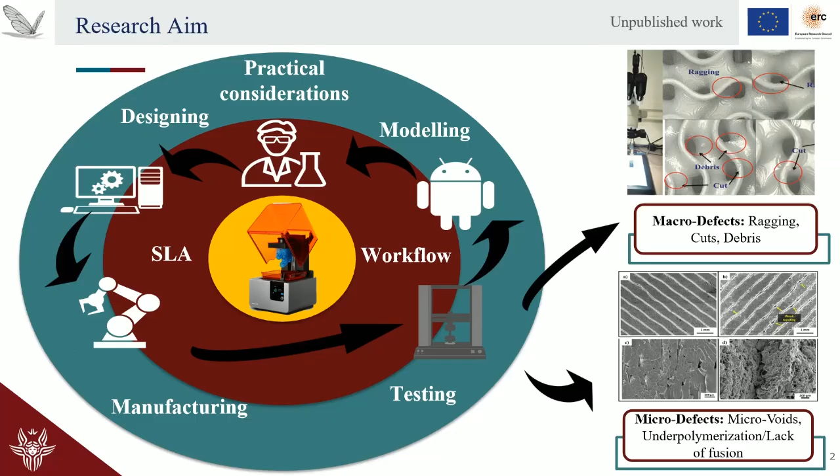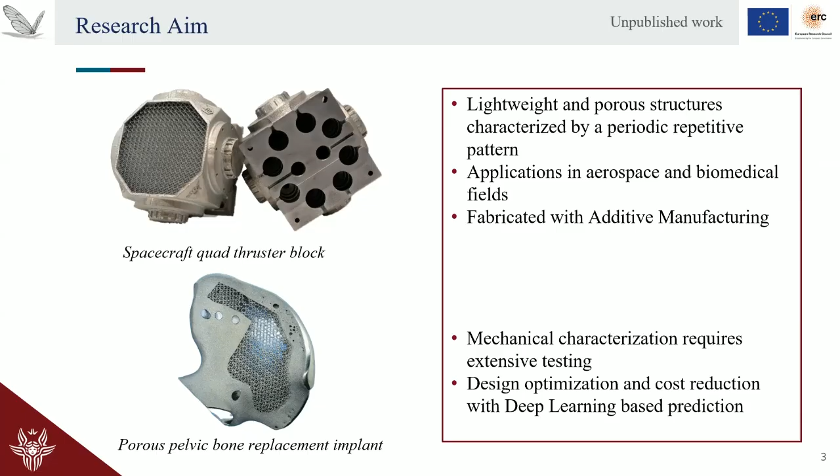So I'm going to investigate lattice structures because they're a very hot topic in recent years. They find a lot of applications in aerospace since they are very lightweight and retain good mechanical properties. And they're also used in biomedical applications to fine-tune the mechanical properties of prosthetic objects. So, sorry.

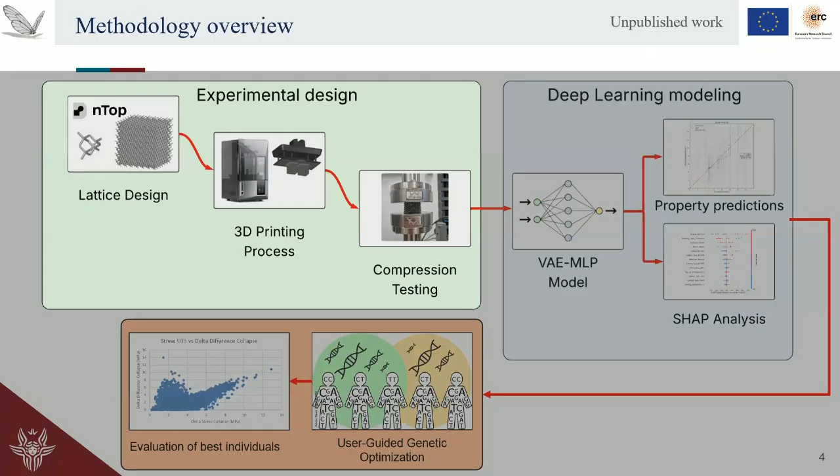Okay, so this is the overview of my work. We start with the experimental design. We dive into the deep learning modeling used in this work, and we finish with the genetic optimization of the mechanical properties of those lattices. So let's dive in with the first part.

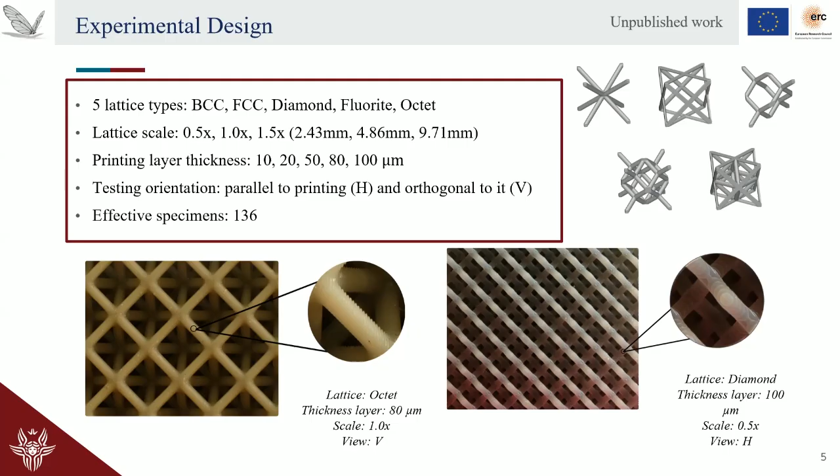Here is the design of experiment used in this work. It's very simple, based on a Latin hypercube. I have considered 5 different types of lattice cells. This is a preliminary study, so this will be expanded in the future. We have the most common ones: BCC, FCC, diamond, fluorite, and octet. And 5 different printing layer thicknesses, because we are dealing with SLA printing, ranging from 10 microns to 100 microns, and 2 different printing orientations, both in axis with the printing direction and orthogonal to it, for a grand total of 136 specimens.

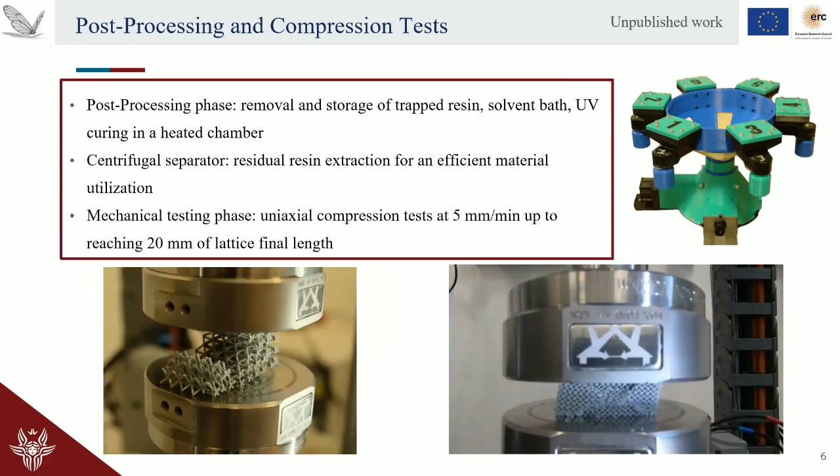After printing, just for completeness, since these specimens are very porous and we are dealing with vat polymerization, we have to properly separate the unpolymerized resin and solvent with a centrifugal separator. After separation, we post-cure them with a UV bath, and after that, we tested the specimens under a static test using a 10 kilonewton testing machine.

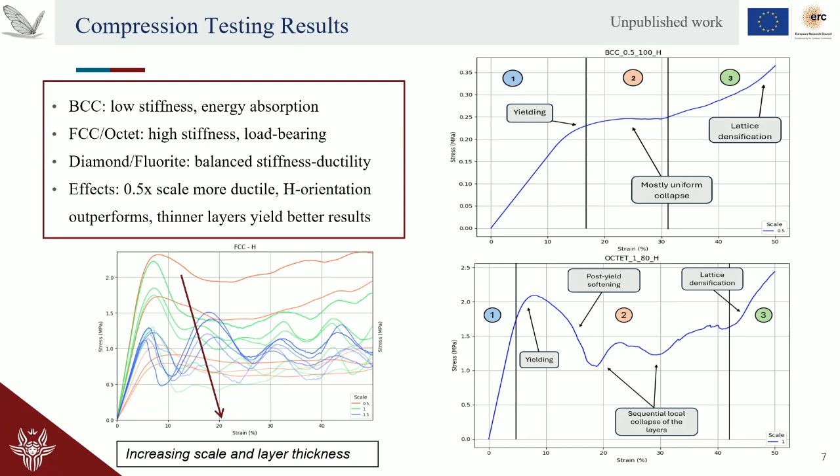And here are the results of the tests performed, and they are very in line with the literature. We see common behavior. For example, the BCC cell shows low stiffness and high energy absorption, but that's no wonder because it has very bending-dominated mechanics. And octet cells have a mixed behavior because they also have a lot of straight pillars that act as stretching-dominated regions. So those cells are high in stiffness and high in load bearing. And that's just to show you that the manufacturing was done correctly. So we can move to the next section.

So here we decided to treat the mechanical response not by modeling the whole stress-strain curve, but just modeling some pivotal points, such as stiffness, yield, energy absorption, and the UTS of the materials. In order to do so, we had to greatly increase the complexity of our AI model, since the task itself is very complex. We are dealing with both topology and print parameters. So we have to improve the model.

In this case, we had to use a multi-head statistical boosting neural network. So it's a neural network, by definition. It's multi-head, so it has one specialized head for each mechanical property that it's trying to predict.

It's statistical, since here we are trying to model a process that is inherently stochastic, since it's a partially observed Markov process. We are not knowing everything about the process, so we cannot use a prediction that is deterministic. We have to use something that is statistical to truly capture the dynamics of the process.

And the neural network itself is boosting, so we have several models, and each one of them is modeling the error of the previous model. So this boosts a lot the accuracy of the overall model. On top of that, we use a common backbone for the head to fully stabilize the prediction. Okay, so it's just a numerical stabilizer, but it also boosts the accuracy.

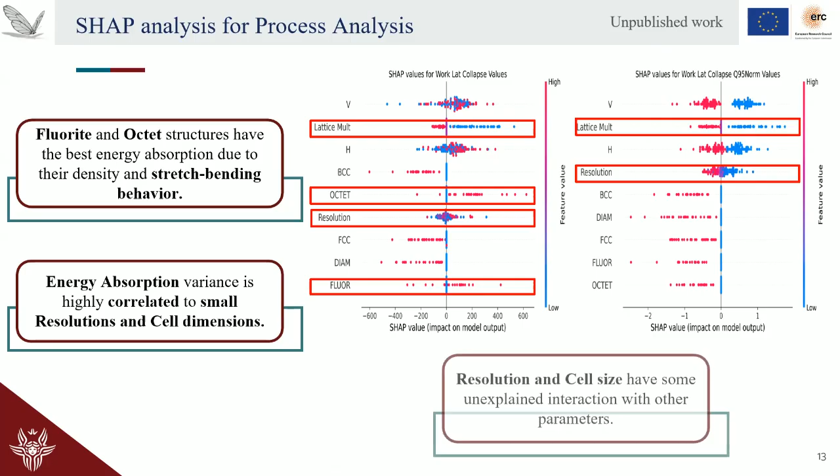But what is interesting is that also the scatter increases both by decreasing the cell size and by decreasing the resolution. And that's very counterintuitive because we are increasing the overall toughness, but we are increasing also the scatter. So our specimen is much more prone to defects. So why that? There is an interaction, an obvious interaction inside our problem.

And by studying the interaction by using SHAP values, this is just a double interaction. But we can see here, it has almost fully decoupled the contribution, and it isn't fully decoupled because probably it's a triple or quadruple interaction, and it's very hard to plot it in 2D space.

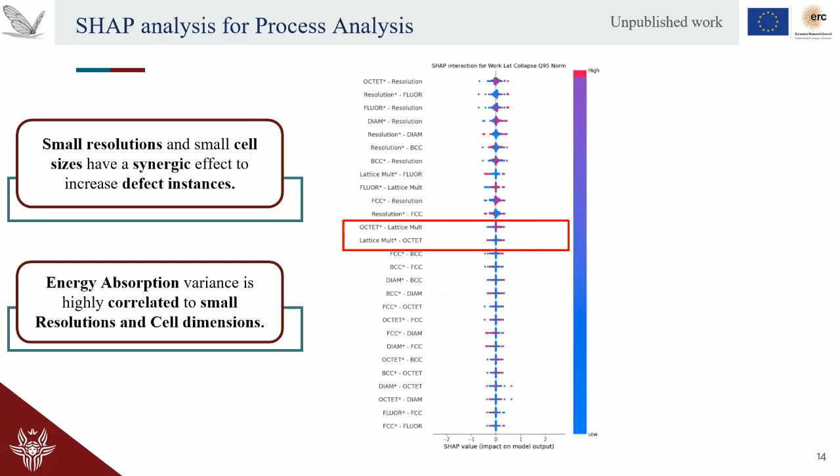So there is some synergistic effect between the topology, the cell size, and the resolution. But why that? The motivation is very simple, because the octet cell is very dense. And when I decrease further the cell size, I increase a lot the density of the cell. And since after washing I had to post-cure the specimen, the light wasn't fully reaching the inside of the component. So inside there are a lot of regions under-polymerized. And this was fully confirmed by observing the fracture surfaces of the specimen, because inside it wasn't fully polymerized.

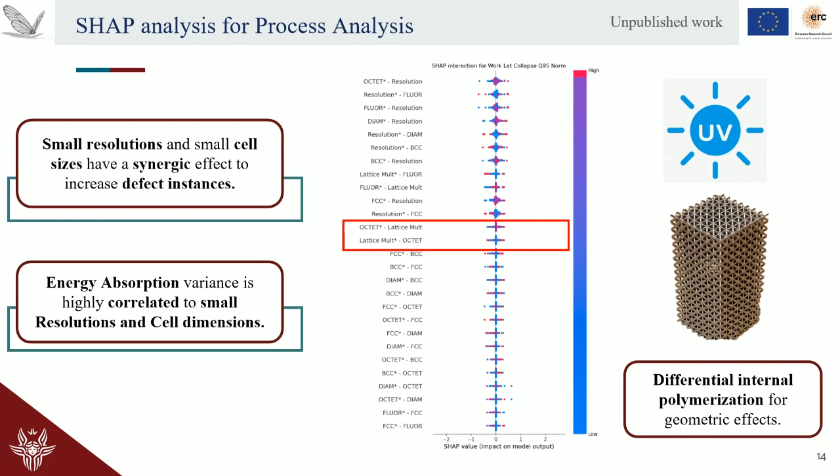But what's interesting is that the model was able to do this analysis by only observing data. So that's really interesting because it fully captured the inner mechanics of the process. But that's just for modeling. Now let's dive in for optimization, because now we have confirmed that our model works. So we can use it as a virtual environment to do some optimization of mechanical properties.

So in this case, I use a genetic algorithm. So you have your input parameters, in this case topological and process parameters. You encode them into blocks. Each block is a gene. Enough genes make up a chromosome, and enough chromosomes make up the genome of the individuals. I initialize a population of individuals. I let them evolve through normal genetic evolution, such as mating, mutation, crossover, inversion, and so on. And at the end of the evolutionary process, I have the optimized mechanical properties.

I have to evaluate each individual by its fitness, but in this case it's very trivial because the fitness is the difference between the property that I'm targeting, what I desire, and the model prediction. And since I wanted to explore a multi-objective optimization, I used the non-dominated sorting genetic algorithm, the third version of it, to explore this min-max multi-objective problem. The third version is very nice because it also allows niching, so you have some speciation in your population, and that's really nice in engineering settings because it gives you completely different options.

And in this case, it's a very simple toy case study. For example, I'm going to show you what happens if I try to design some personal protective equipment, such as helmets. So I want to increase the overall energy absorbed. I want to decrease the density of the helmet, but I also want to decrease the delta between the ultimate tensile strength and the first drop of the lattice in strength. Why that? Because in that drop, the acceleration increases dramatically. So if someone is wearing the helmet, they experience a sudden increase in acceleration, and that can hurt or kill the person wearing the helmet. So I want that to be slower.

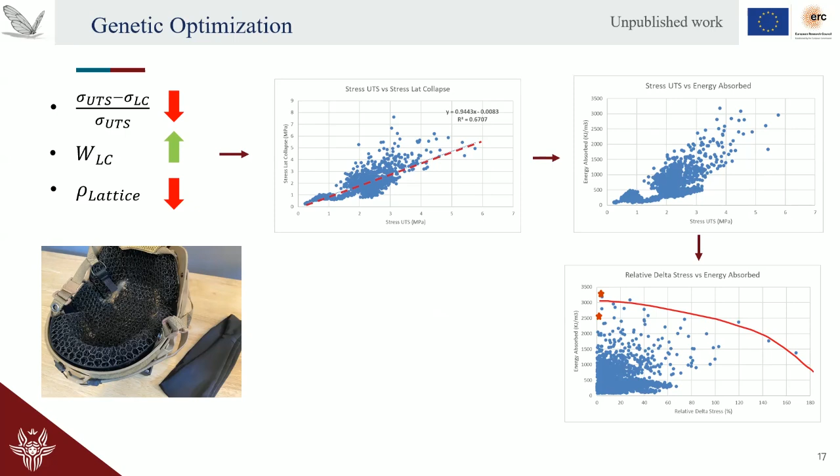So if I start the optimization, I am left with this very nice Pareto frontier. So I can choose two points of interest that in this case are maximizing the energy absorbed and minimizing the drop. And I'm left with those very nice values for both topology and print parameters. Those parameters are optimized, of course, for my printer, for my resin, and this case study. But if you apply this methodology to your work, you will find different coefficients, but it will work because this methodology that I just presented is very robust.

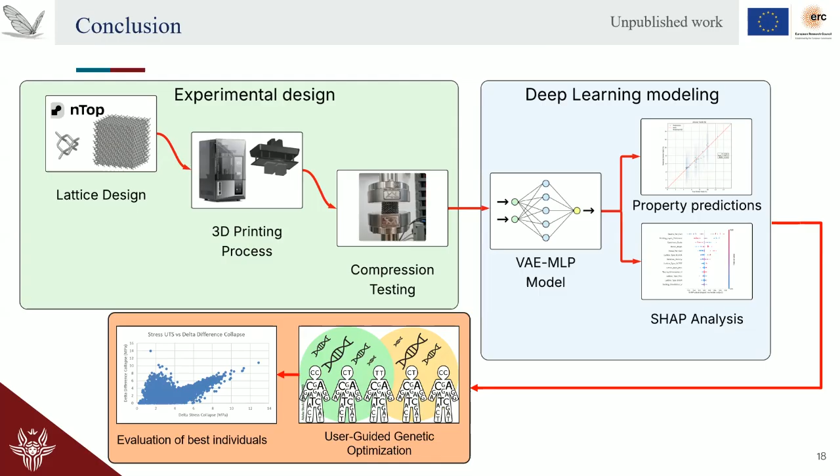So, in conclusion, what I presented here is an end-to-end approach for both modeling and optimizing mechanical properties of virtually anything, lattice structures, but also any piece that you want to optimize. As for future works, because this is just a preliminary study, I want to extend the genetic algorithm capabilities to also hyperparameter optimization. This is something that I've already done in other work, and it's very promising. The results are really something, because the capabilities offered by the genetic algorithm are outstanding compared to any other means.

I want also to extend the modeling capabilities to model the whole mechanical behavior, so the whole stress-strain curve. In this case it wasn't possible because the task is very complex, but by using the model output as integration and collocation points for a future physics-informed neural network, those two networks could play a cooperative game, very similar to a GAN, but not one against the other, but cooperating. So that could work, and it could yield very good results.

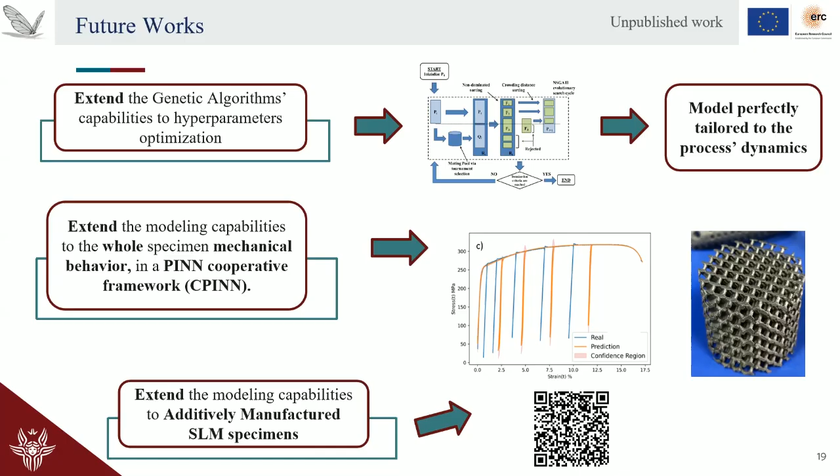And in the end, I want to extend the modeling capabilities of this framework also to additively manufactured SLM specimens, because since it has worked with plastic, it will work also with metals.